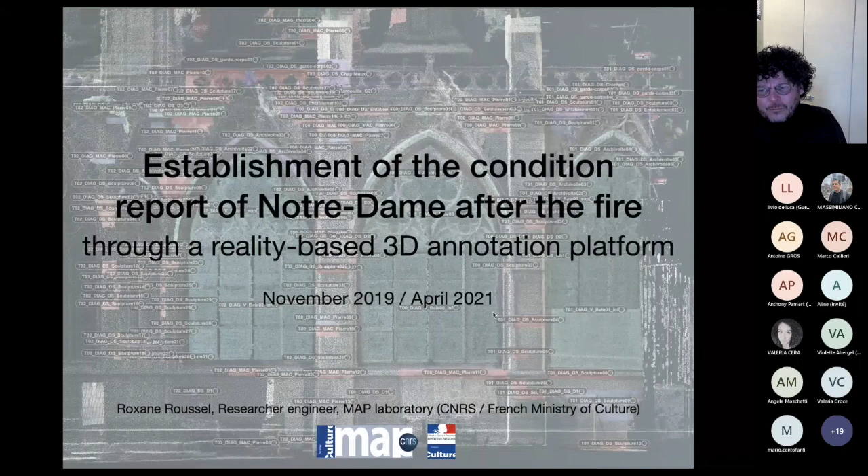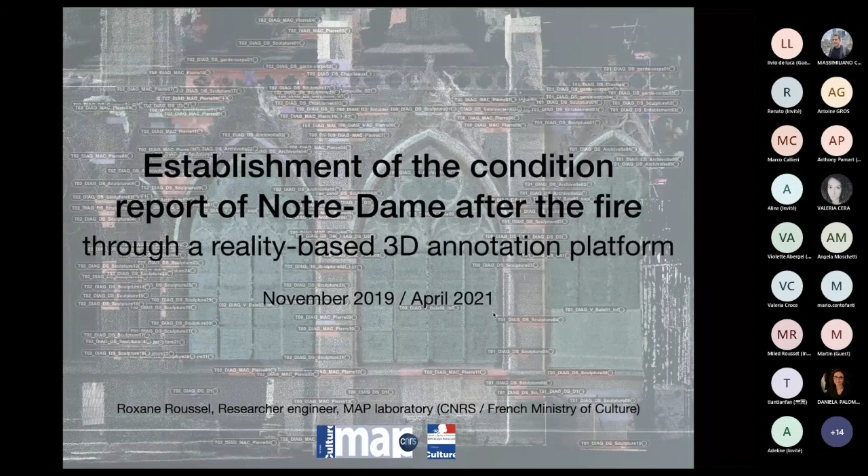I will be presenting the work that I did to try to establish a condition report of the Notre-Dame Cathedral after the fire, on a digital version. This work took place between November 2019 and April 2021.

The very first step of this work was to experiment between the Aioli platform and the cathedral, to see if we could use this platform to create a series of projects and annotate them accordingly to a diagnosis made by the architects.

A very small presentation of the platform: the Aioli platform is a reality-based 3D annotation platform for the collaborative documentation of heritage artifacts. It allows us to create projects or scenes with a series of photographies, and with the generation of a 3D point cloud, we have the ability to annotate with a series of groups and layers, and also to collaborate with different people on the same projects.

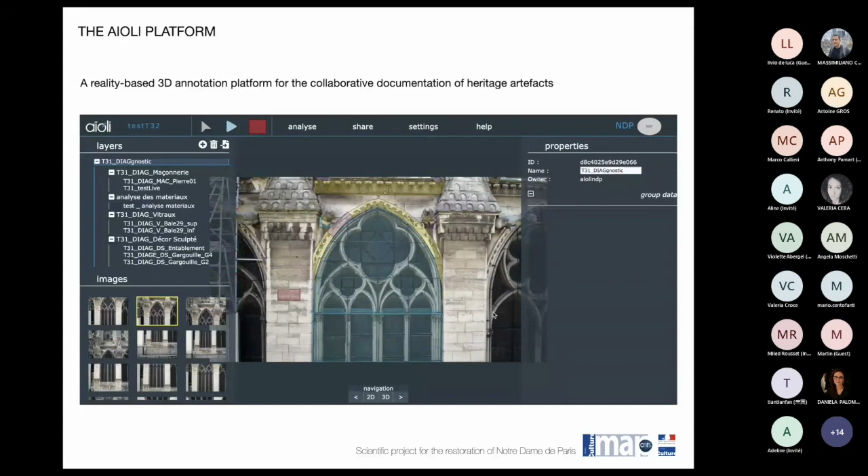My work began with an experiment on the platform. At the time, we didn't have the full diagnosis made by the architects and specialists of the field, so the goal was really to make personal observations on the platform to see if this method could work.

The first thing was to test the different images that were available to create a series of projects, to see if the point cloud was dense enough and precise enough to make specific annotations on them.

There was also the goal to test the organization of the projects, to see how the groups and layers could be named, and how we could fill in a series of personal observations, for example with the creation of the user descriptors that you can see here on the right.

We also had the idea to test the ability of the platform to handle a very large number of annotations. For example, here is a project of the vaults of the cathedral, and here you have between 200 and 300 different annotations.

It was also very important to see if we could still navigate quite freely inside the project, and if it was still something that would be usable with the final diagnosis.

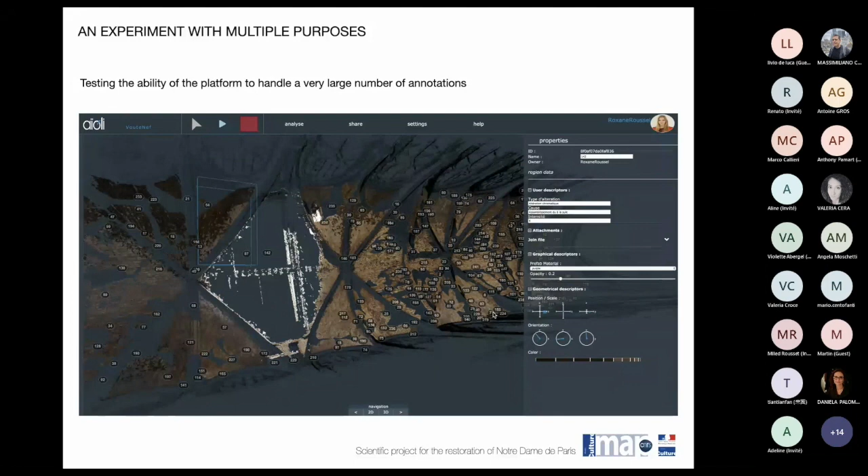While testing these different aspects, we also had to test them on different objects to see how the platform would behave. So you already saw images of the inside and outside of the vaults, with the remains that were from the roof originally.

Tests were also made on stained glass windows, to see if all the annotations could be propagated very well between the different photographies and to the point cloud.

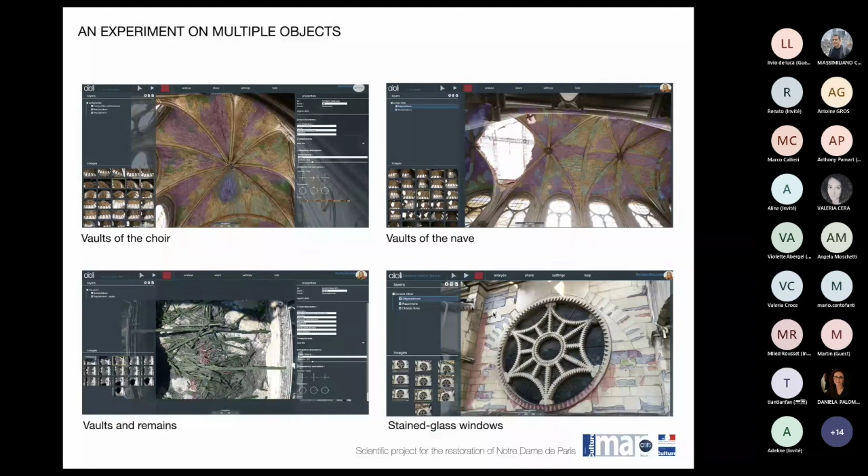Here is a short movie that I made at the time to show a bit of the process. So here is the platform and the project that could be created, for example, for the inside of the vaults.

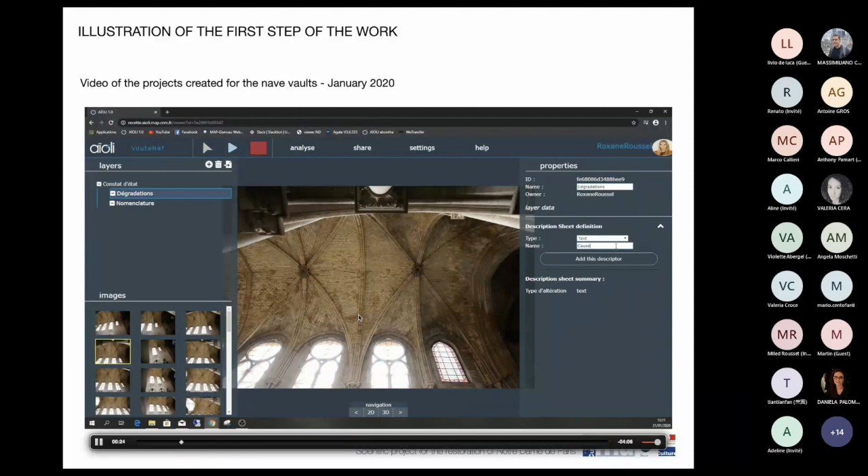You can see the creation of the groups and the different layers that allowed us to organize the diagnosis, but also to name very precisely each part of the cathedral.

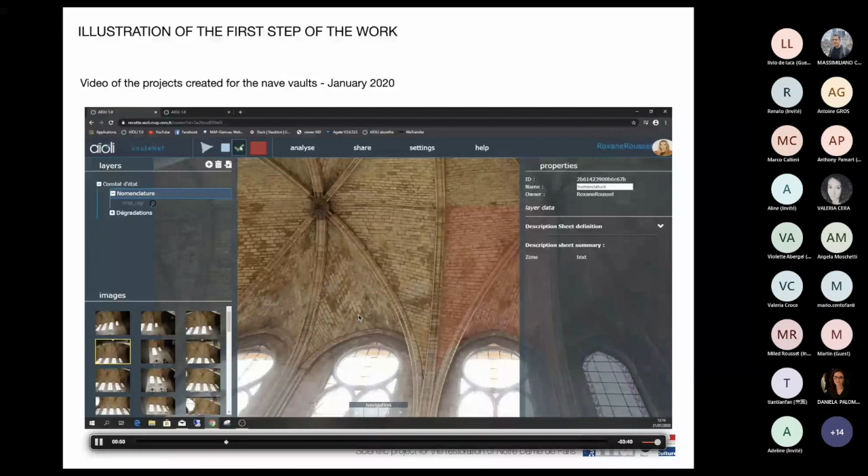It is also important to note that at this time, everything I did was really based on personal observation. We didn't have the final diagnosis made by the architects and professionals, so the goal was only to observe things and annotate them, to see if the platform could really work with such projects.

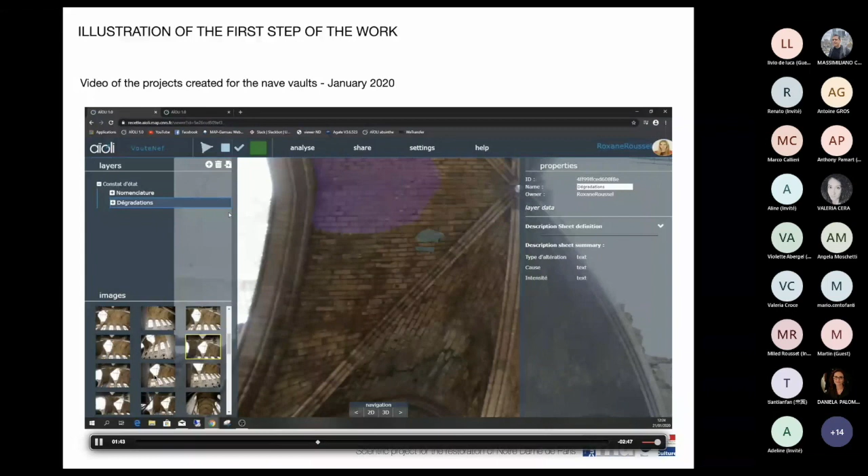Of course, you had multiple possibilities to change the color or the shape of the annotation that you wanted to create, which really allowed us to create a diagnosis that could be really precise.

On the side, you always had the possibility to create what we called user descriptors, which allowed us to fill in a series of information, for example the type of alteration that was observed, but also the cause.

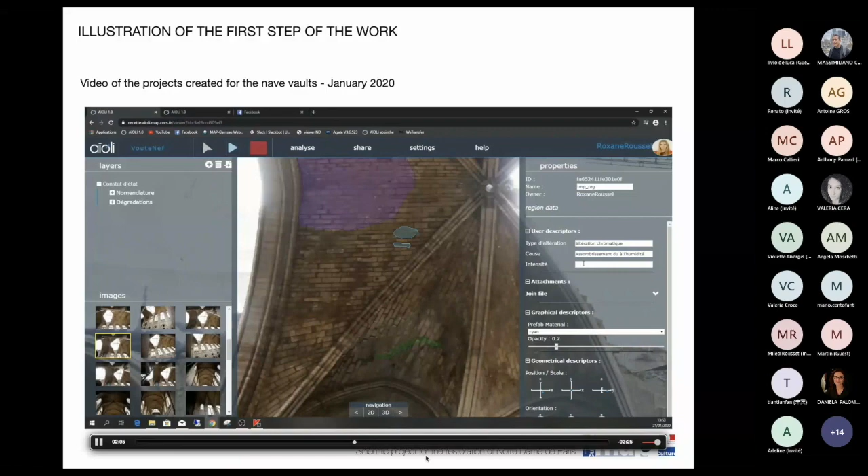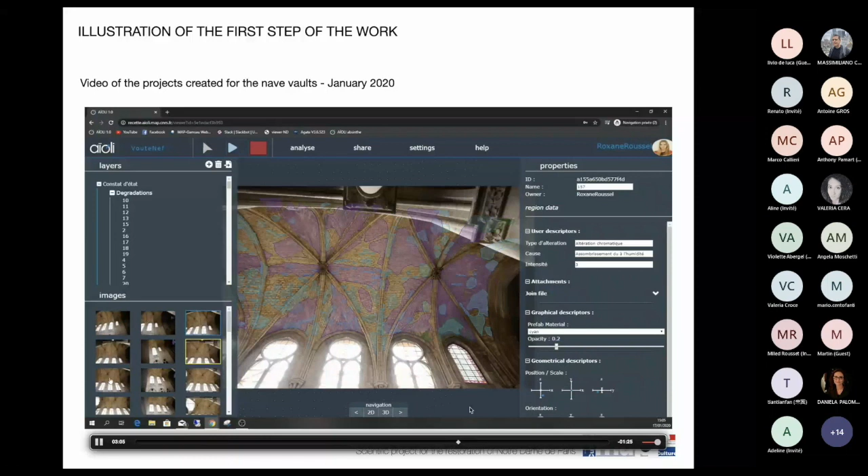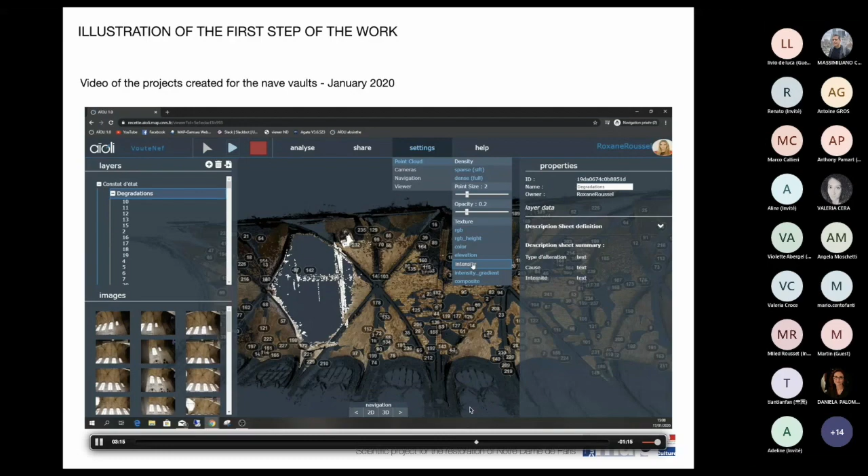Here you can see what it looked like once every annotation was made. This is the final test, as I could say. Here, same as before, there were around 300 different annotations, each named and precisely informed, and this is the result on the 3D point cloud.

You also have the possibility to change a little bit of the settings to have the view that was really fitted to the observation that wanted to be made.

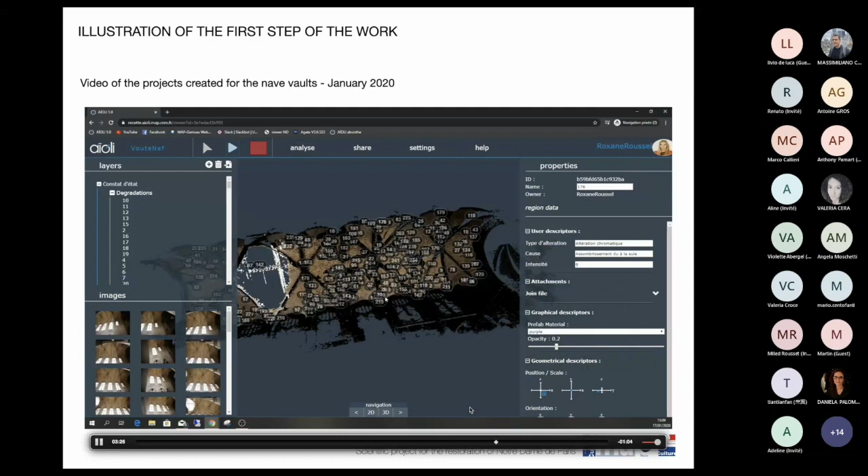And the second step after that was really to create the construction of the different projects for the digital version of the diagnosis. So this work began in the summer of 2020.

As was already said this morning, we really had an enormous quantity of information and images. We received around 1,500 photographs from the outside of the cathedral. So there was a big step to classify, choose and select the most important images, and then divide them into a series of smaller projects that could be directly imported into the platform.

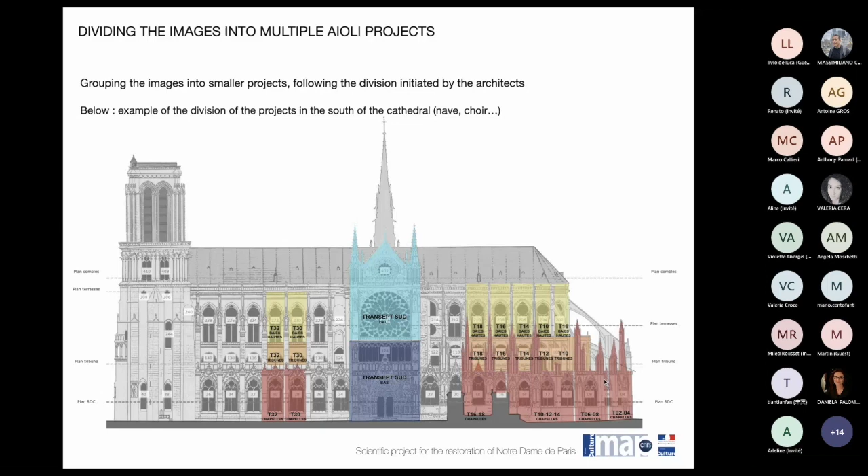After the division and establishment of the different projects, it was time to create a prototype for the annotation of the final diagnosis. The architects had sent us a precise diagnosis for one piece of the cathedral, and the goal was to try and replicate that into the Aioli platform.

To see precise elements like the way we wanted to name our groups, our layers, the way we wanted to name the annotations. All of this work was really important because this method would then be replicated to the 115 other projects created in the following months.

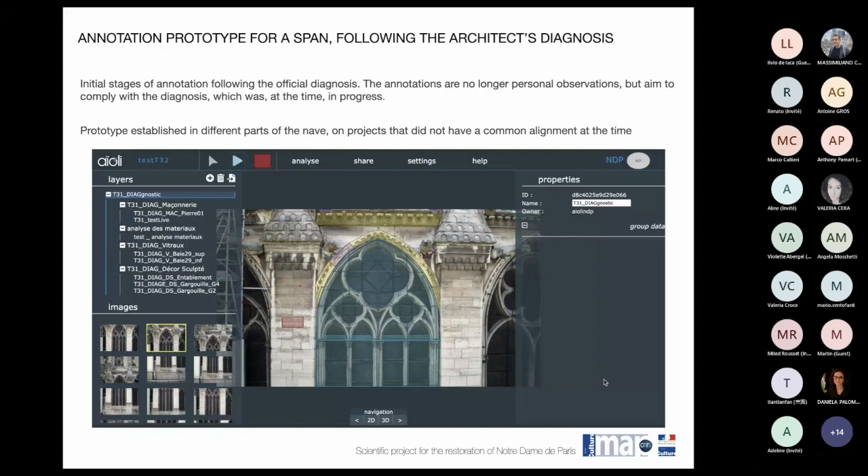The third and final step of this work was to finally establish this digital diagnosis on the rest of the projects and to establish this method on every one of the scenes.

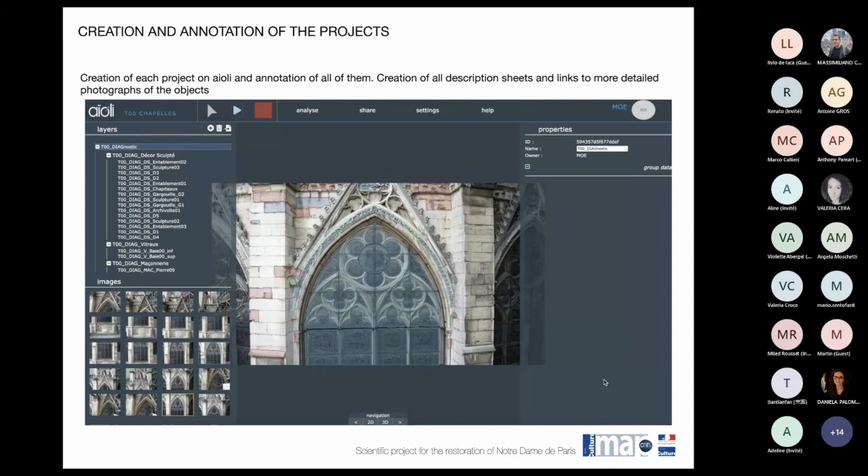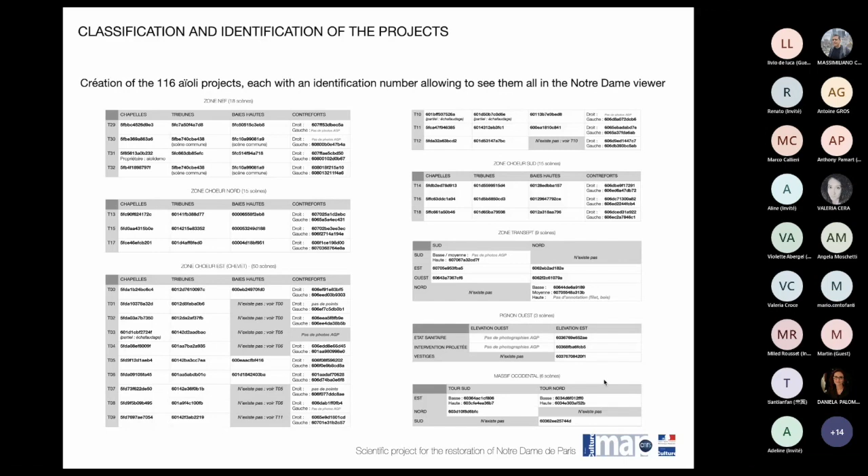Here you have the final listing of every project. As you can see, every piece of the cathedral is provided with an identification number, and this number allows us to consult the project. It's really an ID card to find them in aïoli, but also to import them directly in the viewer. This list is the final naming of every project created for the different zoning of the cathedral.

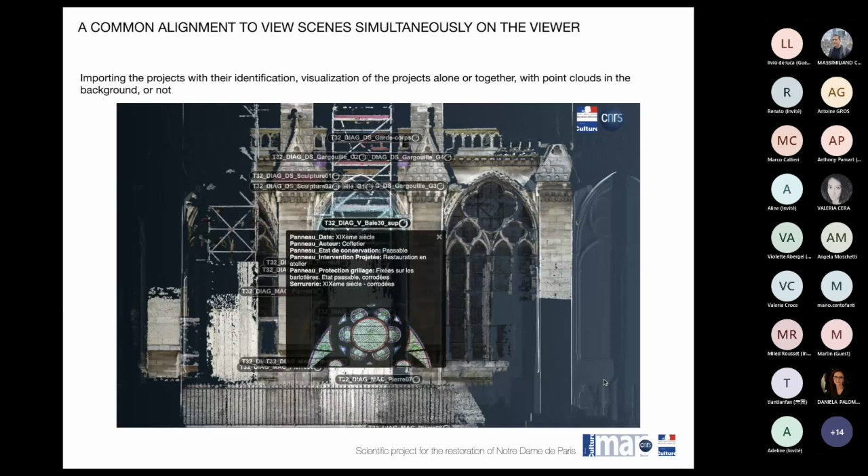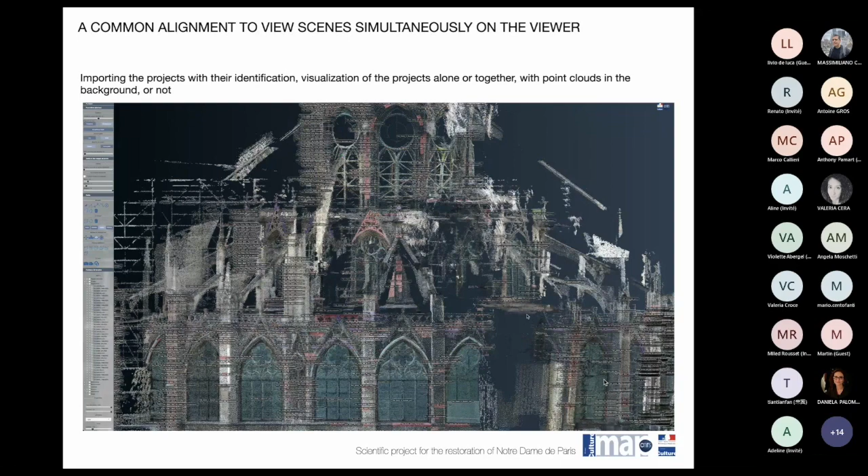Here you can see one of the pieces of the cathedral inside the Notre-Dame viewer. If I move on, you can see how it would look with multiple scenes in one environment. You also have multiple possibilities to see the scenes separately, but also multiple at the same time.

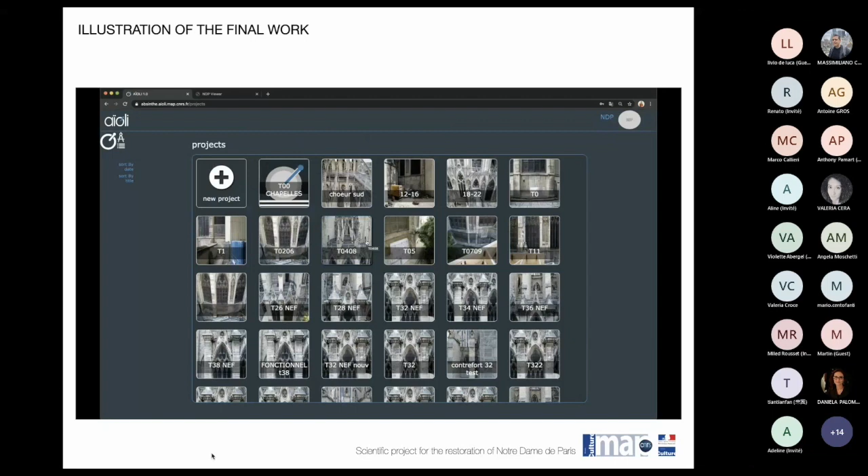I think this movie will illustrate a bit more what I explained. So here you had, again, the first step of the work, which was the creation of the project and the naming of every single project.

And here you also had the possibility, not shown in the previous movie, to share this project with the other collaborators that you could work with.

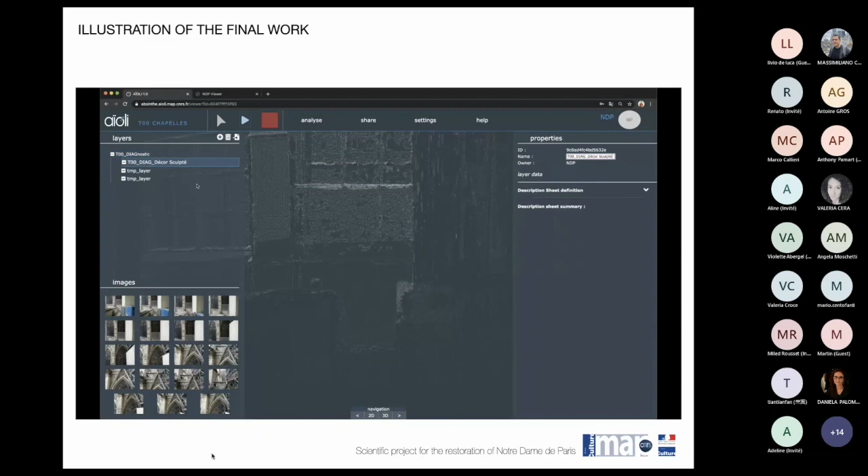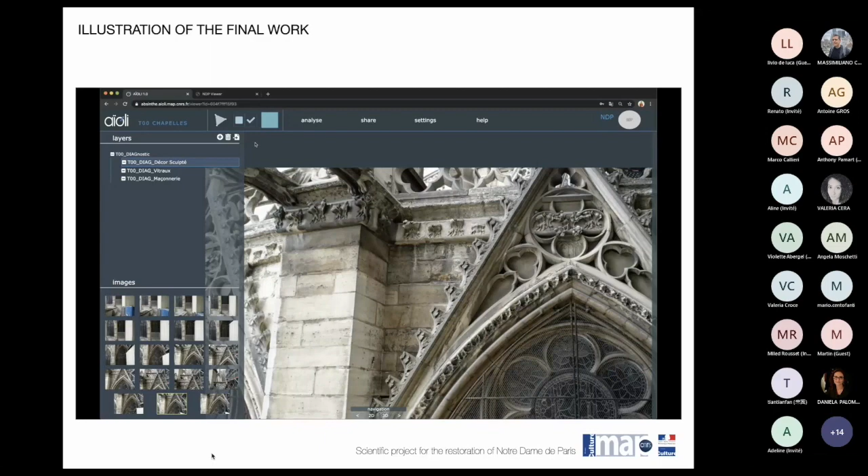And here the final steps of the naming and the creation of the groups and layers in the final scenes. As you can see, we had 3 different layers: one for the sculpted details, one for the stained windows, and one for the stone. This division was established by the architect, so once again the goal was to do something very close to what the professionals had previously established.

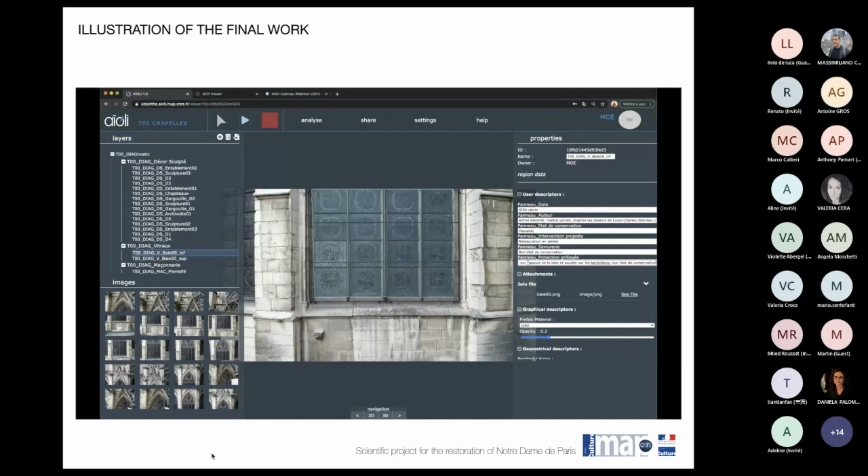Once the annotations were made, the description sheets were then created and completed. For example, here you can see description sheets linked to the windows, and I wanted to include a series of information according to the date, the author, and the restorations that were envisioned.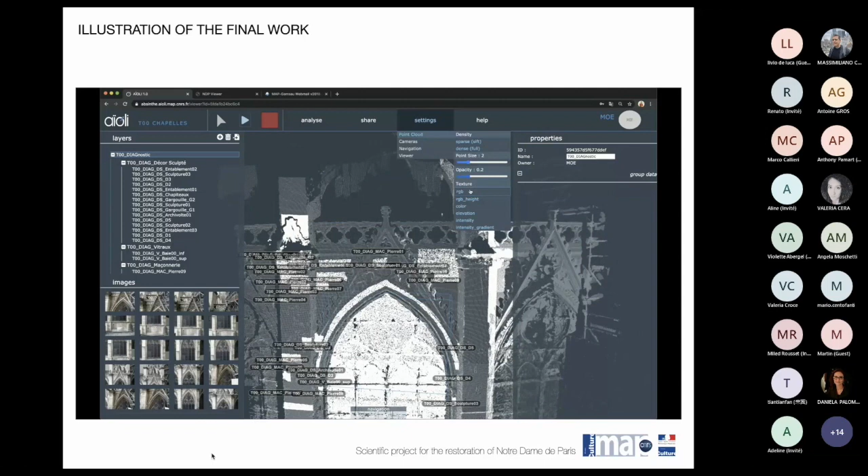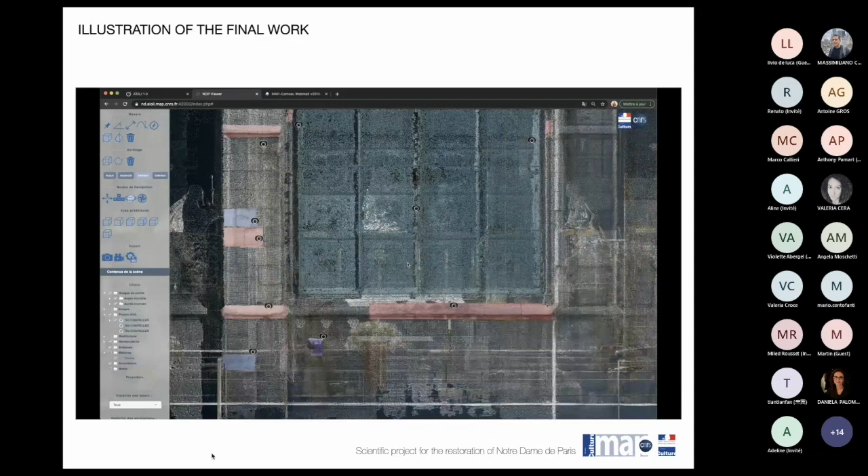And here is the result on the point cloud, in the 3D space of the projects. Finally, I had an example of this scene imported directly in the viewer, so you can have every piece of information that you previously filled in on the Aioli platform imported here. You also have the same color code for every one of the annotations.

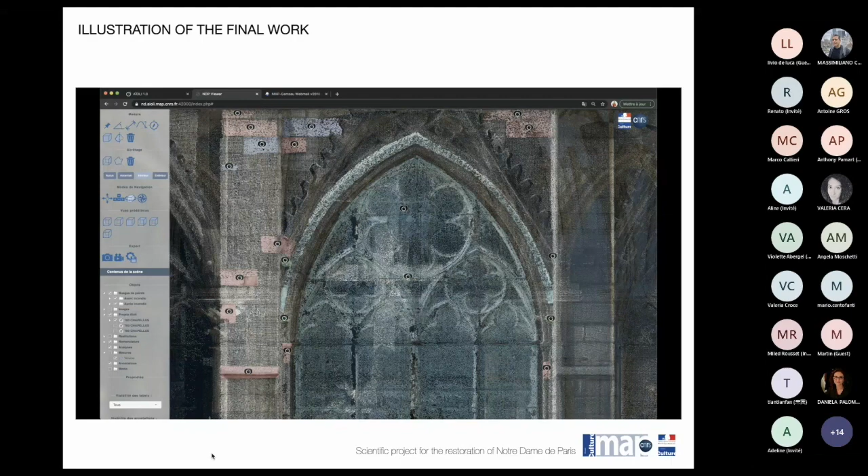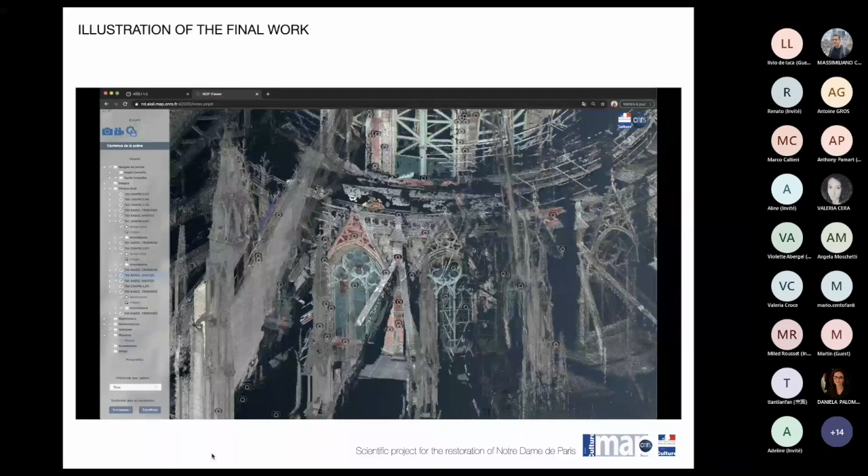And here, what it would look like with multiple scenes in the same environment. Here we had a total of 9 scenes, 3 per floor, and you can really navigate through the project. Once again, you will have a little more detail about this work with Violette later on.

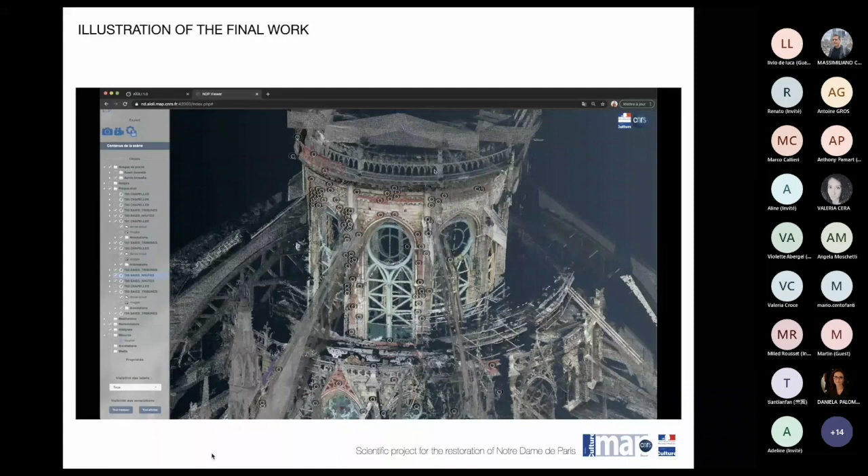Here you can see that we have this time every scene from the choir that were imported in the viewer, onto the global point cloud of the cathedral.

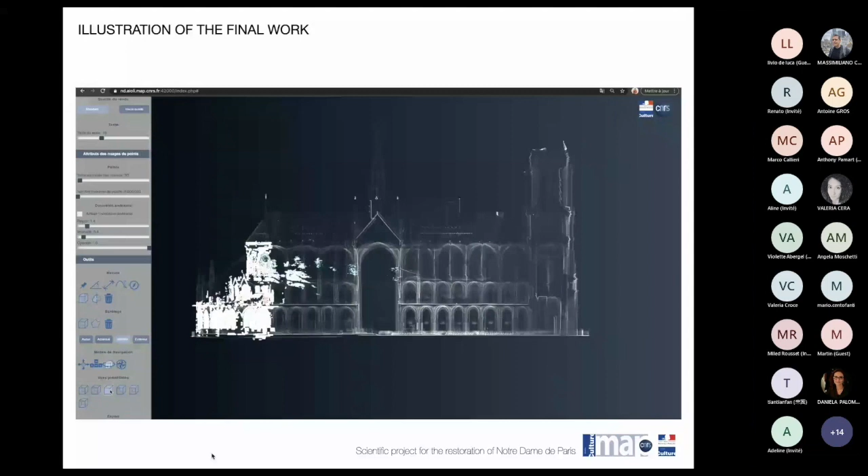So here is the end of my presentation. This work was finally completed in April 2021. Now every one of these 116 projects has been completed, annotated, and can be imported into the platform.